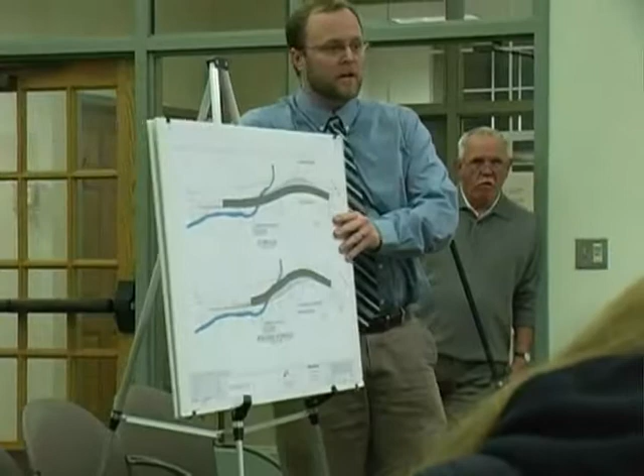Just a quick question - could you please explain how a different design, which is what is under feasible alternatives, would cause more pedestrian and bicycle hazards? How is that possible, if you change the design? That would be the do-nothing alternative. Any of these alternatives we're showing you here would be considered safe for vehicular or pedestrian traffic. The do-nothing alternative is the one that has issues.

We have issues with certain aspects. Oh, okay, so nothing at all, period. Well, the do-nothing alternative means to replace the bridge, but not realign anything, and not make any other improvements. Is that correct?

Correct. My question would be, what's the benefit to the wetlands? Is there any benefit to the wetlands with either of those alternatives? I have another sheet you want to present?

So I'll just give you an overlay, look at the two of them on top of each other, the preferred and the basically two others. Before you go down to the new sheet - excuse me, the basic difference between these two alternatives and the preferred one is one seems to be moved over to the north and the other seems to be moved over to the south. Correct. I guess during the field meeting - so it's a horizontal change in alignment?

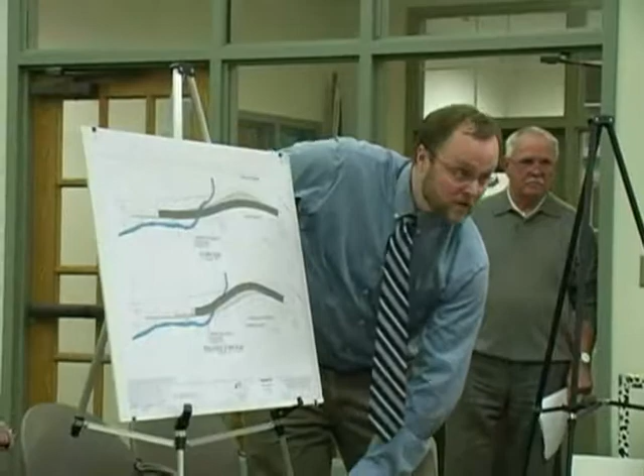Yes, not a vertical - there are vertical changes too. This has more to do with the next sheet, this one right here.

Now, assuming we're going to maintain vertical alignment, vertical geometry, and we're going to move that road over as suggested during the field meeting - this blue line will show the impacts, the cut and fill impacts.

The red line is our preferred alternative, as shown up here on top. The amount of impacts to do that would be just over 3,000, whereas our proposed impacts would be just over 2,000. So you're adding another 1,000 square feet.

You're actually also cutting trees down all along here, even though you're minimizing the tree cut on that steep embankment. You're going to be cutting all the trees down here. We'd also require a taking easement from the property to be able to get this road shifted over.

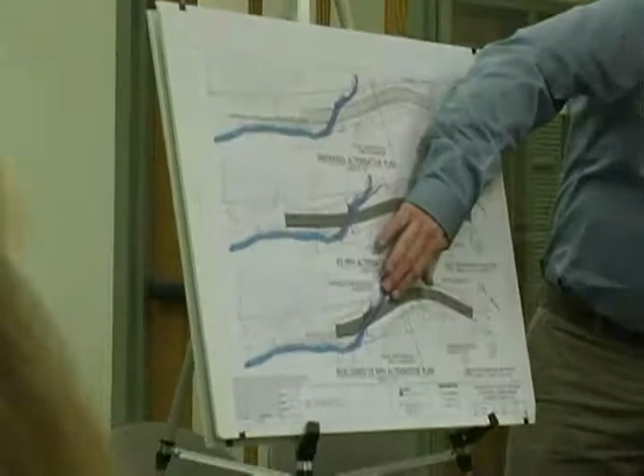It would increase the structure costs because this structure now is elevated and extended much farther than the original, so the structure costs are going to be more involved here. This would be the 45 mile per hour alternative.

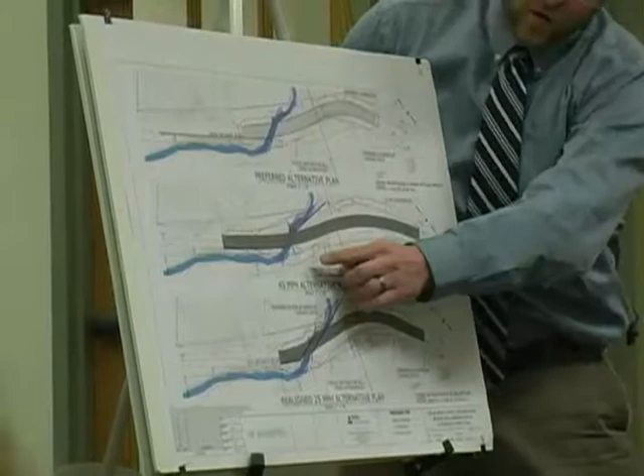Similar thing with the vertical alignment here - the bridge is going to be raised up, raising the substructure to be much higher. So you can see how the impacts are a little greater here because you're going to be filling in more, and about the same, maybe a little less here, about the same up through that steep bank. You're not going to be saving the trees on that embankment. So that's just kind of a layout.

So we have a preferred alternative that we had proposed to the commission, which is 2,000, and then it goes up to about 3,000 with the realigned alternative.

We also were asked - question? Yes. Is that allowed? Do I have your permission to ask a question? Are you finished?

I was going to show the sections, but how about we get the presentation done first and we can ask questions?

These alternatives actually increase impacts to the wetlands compared to the preferred alternative. We're pretty much maintaining the geometry of the road, making roadway and safety improvements here, but the impacts to the wetlands are going to be increased. I was going to go on to the sections next, but if you have a question.

Before we go into sections, do you have a question specific to this? On that bottom alternative plan, the one that's realigned at 25 miles per hour, how many feet are you moving it, going north-south?

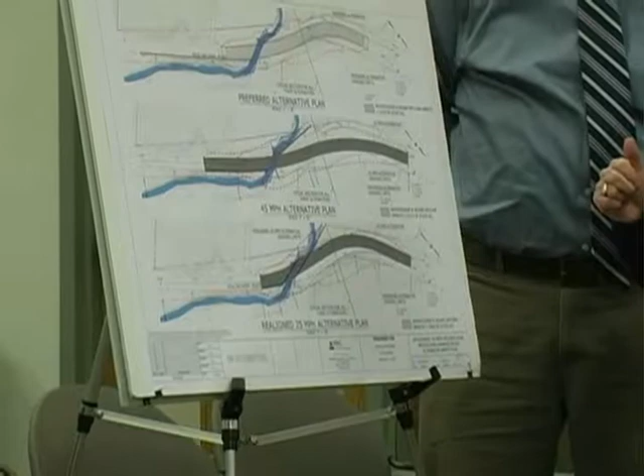I'd have to scale it off the plan, but that red line is the existing road, so it's probably about 20 feet. But the request was to move it 2 to 4 feet to the southeast, not 20 feet. That was a request at the site walk meeting. Do you have a plan describing that? No, I didn't get that as part of the comments, so I did it as a realigned, 25 mile per hour. It was a written handout that was given at the meeting.

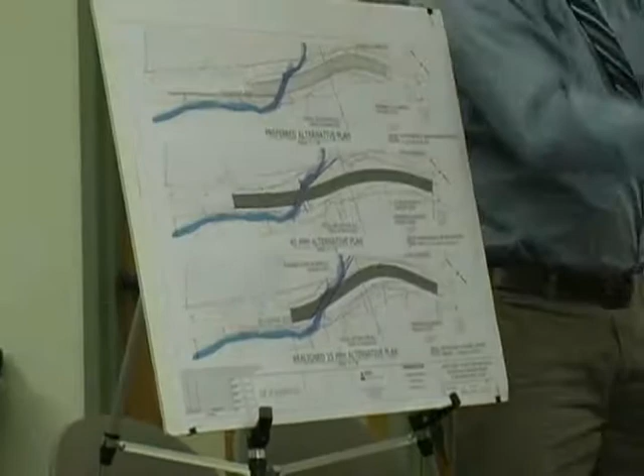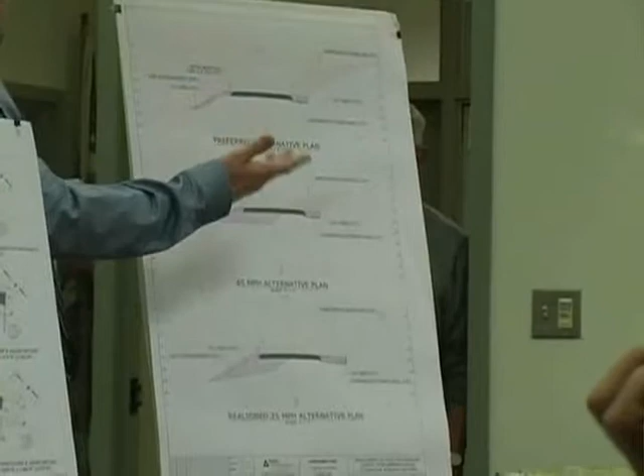The first one is the preferred alternative plan, which shows what we had proposed before. We're limiting the amount of fill that we have here, but there's the cut in that embankment.

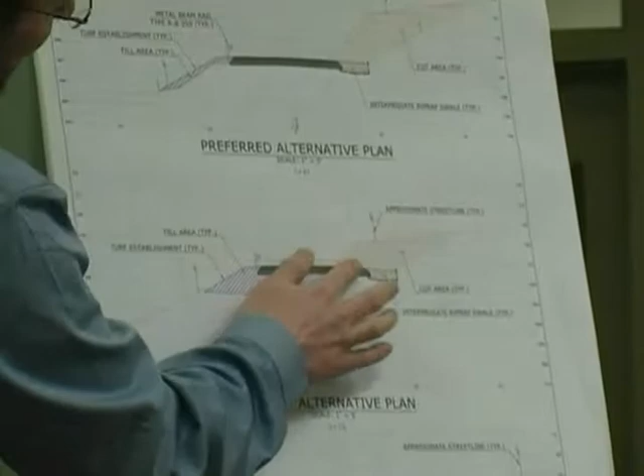Our second was the 45 mile per hour option, where now we have to shift the road over to meet the 45 mile vertical and horizontal geometry. So you can see how the road is above the existing road bed vertically and shifted over horizontally. So now we're still cutting this area back, still cutting that embankment of trees, which means more fill—yes, much more fill.

The third one is that proposed roadway where we're coming off and realigning at the 25 mile per hour alignment. To achieve that, we couldn't achieve a 2-foot move—we'd have to move it 20 feet at that area.

So you understood the request? Well, I don't know, it didn't necessarily work out for this 2 to 4 feet thing. I was asked to realign at 25 mile per hour, aligning it with the project limits, so that's what I tried to present. This way you can see it shifted over, and there's much more fill.

As far as the bank removal—the embankment with trees? Yeah. At the November meeting, Commissioner Dawkins suggested a terracing of the bank. Yeah, we looked into that. That's not really feasible based on our watershed and the required drainage here. If you put a wall in here or any kind of terracing, you're still going to be impacting the slope.

So you're saying if I put a wall right here, to build that wall with any kind of engineering standards, I would have to cut this material back out of there—pretty much the same amount that you're cutting back now. I'd be able to fill back in, but the trees would still be gone. So you're saying it's going to be a negligible difference in terms of disturbance? Correct.

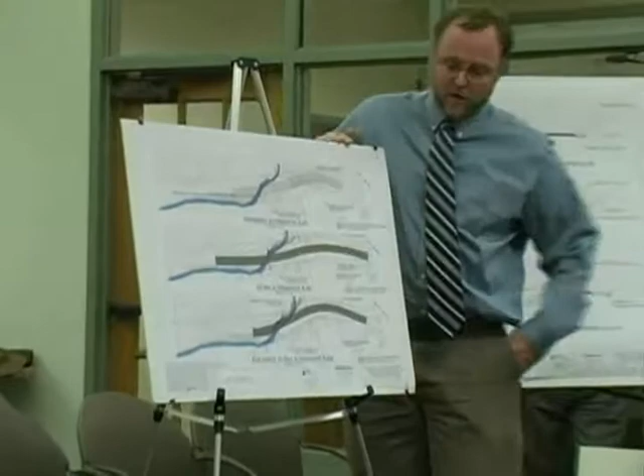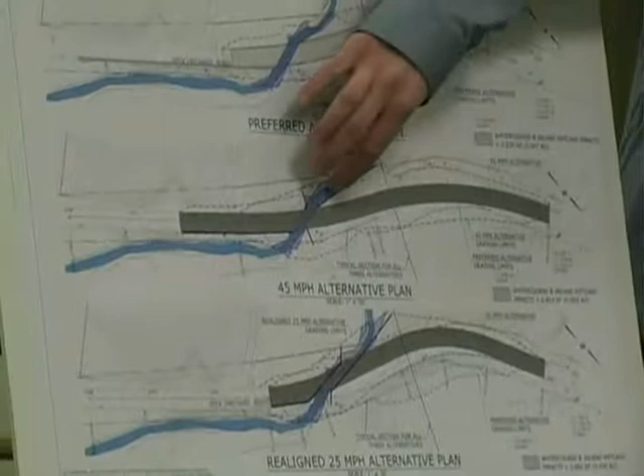The heavy black line is the wing wall? Yes, the new wing wall. So we'd have to make this wing wall that long to avoid filling in because we're raising the road up in this area. And in order to build that wing wall, we'd have to access the channel, coffer in the channel, dig a foundation in there. So you're actually going to have to temporarily move the stream? Yes, depending on the toe or the front side of the wing wall, might be a couple feet. We can try to use some design things to make the heel bigger and the toe less intrusive into the stream channel environment, but I'm thinking at least 7 feet, actually impacting where that channel is, at least during construction. During construction, and after, we'd have to riprap it, put the material on that we described last time, and fix the channel.

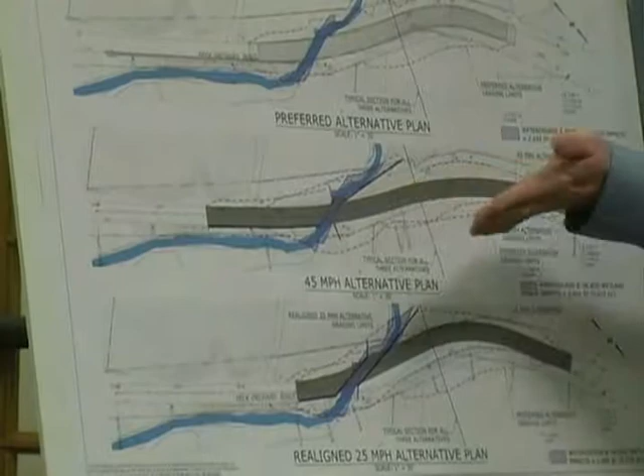So that purple shaded area was just, hey, we're gonna definitely be in this whole area. Kind of moving the channel, we probably have to widen it out a little bit here because we're going to be filling in so much with the huge wall that we have there. If you raise the road, that's got to be the option that requires the most fill, right? Correct, yeah, you can see it on there. This area, just in that one particular section. Now, as you go higher up the hill towards Massachusetts, this is going to reduce down. And as you get to the bridge, that's going to increase.

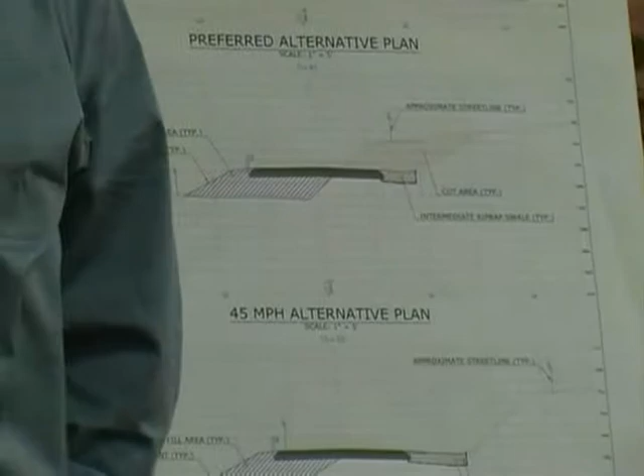Because the new road is going to be 24 feet wide, is that right? Correct. How wide is the road prior to that, coming down the hill? At the bridge, I believe it was 20 feet. 20 feet.

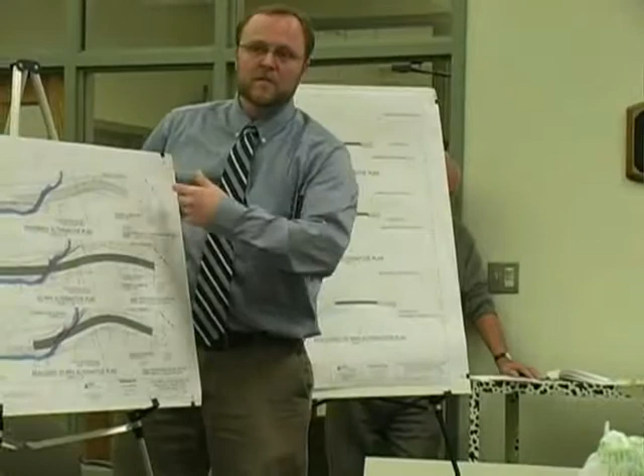How wide is the road beyond that area? It differs, it's not uniformly straight. You don't expect people to drive 45 miles an hour on this little piece of road, but the previous section and after section aren't built for 45.

That's right, that's why we'd have to realign. So what, are we having different speed limits going up here? No, it's posted for 25 miles per hour. Yet this is built for 45? No, our initial design was for 25 miles per hour.

Yeah, but the road you're proposing is for 45, the alternative we're looking at impacts only for the commission. No, sir, we are not proposing that. That was an alternative looked at the request of the commission. We're proposing a 25 mile an hour design speed, not 45. The 45 was just an alternative looked at to show you the impacts, what that would mean.

Because in theory, the road should be designed for 40 or 45 miles per hour according to the DOT and federal standards. We've been able to get an exception to those standards to design it at 25 miles an hour in order to minimize impacts to the wetlands surrounding it.

Probably a proper speed for that whole road. Well, it should be, yeah, that's what it is. It's posted 25, but people are traveling 40 plus miles per hour. You say there's 400 traveling on that road, I doubt that also. There isn't that many people living up above that road.

Do you have one point to make on this statement, that on the road from the Mass border down to the North Granby border, there was a study done in 1997, and the average width of the road is 16 to 18 feet, plus or minus. I have documentation for that for the commission. So we're dealing with a very narrow road to start with.

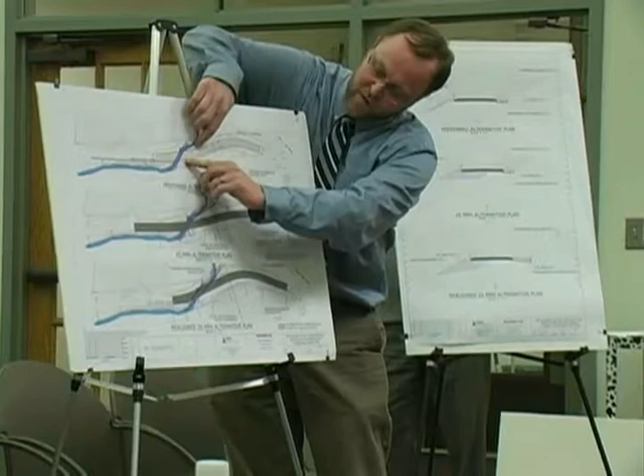Very, very narrow, with many multitudes of curves. You can see an area right here, this black line, this curve, we're matching that edge. It's only a couple feet wider, and then you can see how it changes. We're trying to fit in our 25 mile per hour design, and we hugged this side and expanded it out here, but at the ends we're grading right back in.

Now could you please describe the impact on the realigned, last one, alternate plan? This alternate was to shift it 2 to 4 feet. What I tried to do is meet this incoming tangent at 25 miles per hour to avoid any impacts to the embankment.

I primarily thought that was the main intent, to stay away from the realignment embankment cut here, so I have to put a 25 mile per hour curve in here. That's across pretty much the same profile, and then I had to introduce another 25 mile curve down here.

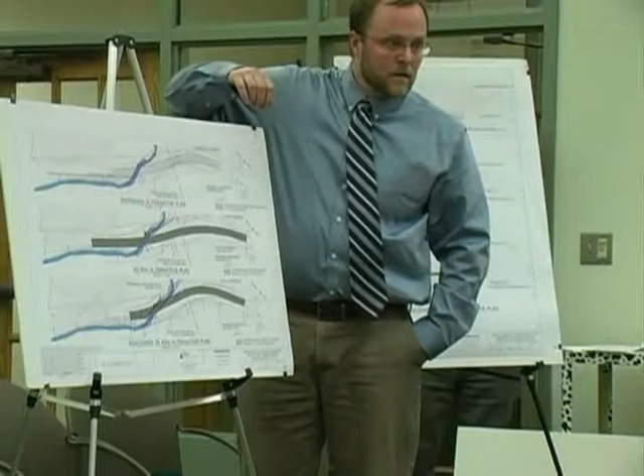So by the request to move it just 2 feet over, wouldn't have been possible? Because you had to design for 25 miles an hour? I have to design for 25, so I have to put a curve in here, I have to meet the incoming tangents, I just can't do a sharp curve and not make it work. My intent, I thought, was shifting it to avoid any cut to this embankment.

Which is up in the upland review area and outside, so I thought that was the intent of shifting it over, to avoid any impacts in this area. As you can see, it's right along the edge of pavement, because I'm assuming we're going to remove that pavement and not leave it there.

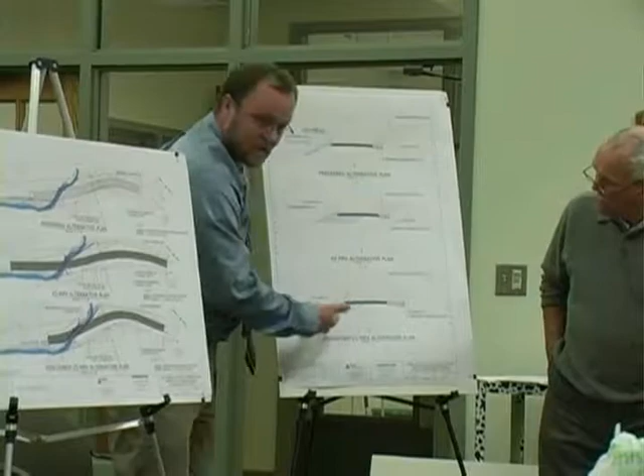So you avoid impact on the embankment, but what do you do for impact in terms of drainage? This is putting in the area for the drainage, I get the water sheet off the road into that drainage, bring that down. Shifting it over is going to start to fill in the upstream wetland area. So in addition to cutting all the trees down, you have wing walls along this plan as well.

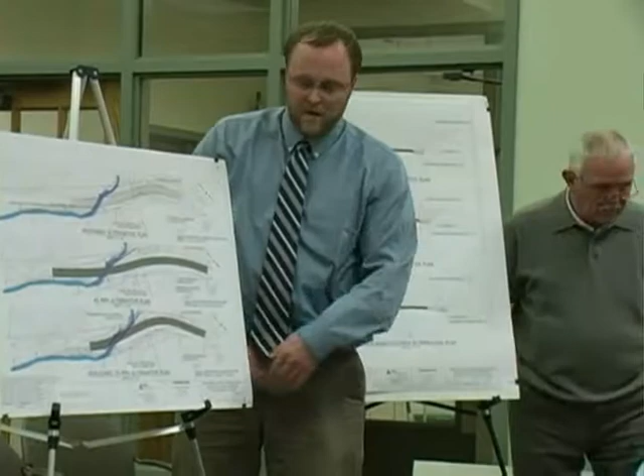On the other, alternate, correct. And graphically they look like they're at least as much impact in terms of wing wall length as you have on the 25. They might not be as high, not quite as high, because vertically I'm trying to match the length, correct.

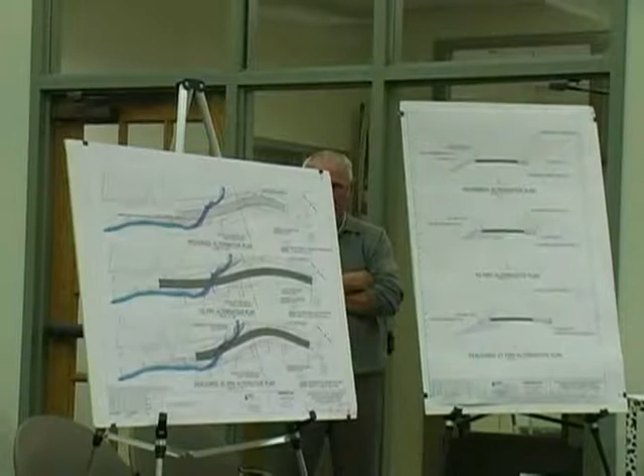I didn't highlight that one as visible, but this plan will show that. This is 1:20, so the scale's a little bit different. Why don't you put it over there so we can see it all together. I'll move this out of the way. Yeah, that's good, you can do that, that's fine.

So where are the wing walls there? I see, the wing walls are in orange. So what we're doing is comparing right now, in terms of the impact of the stream bed, are we comparing wing walls? Wing walls, in terms of impacts to the stream bed, these wing walls and retaining walls, because those are the ones that seem to be impacting the moving of the stream.

This one's gonna be more of the stream, because we're shifting that bridge over. Do you see the blue here, that's the channel? We're actually shifting this bridge back to avoid realigning the stream, so we'll utilize our excavation area here for the stream instead of having to realign any material up here. So I shifted that structure back in the picture, so I can make a nice U-bend in here instead of having to...

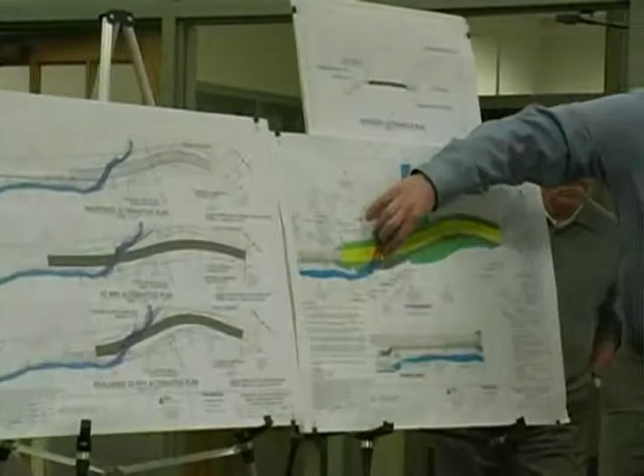Why would you shift it? Well, if I put this structure here, I'd have to make this wall even longer to match that grade, because now I'm shifting it over. So what I tried to do is use the natural alignment of the stream to go through, and put my abutment wall here.

On your preferred alternative plan, the bridge is in exactly the same spot it's in now? Yes. And the other two plans have to be moved? This plan, no, the 25 mile per hour, I kept it in the same spot. Bridge itself, right, because the alignment is conducive to not having to realign the channel. This alternative, shifting it over, this channel has a little S curve in here.

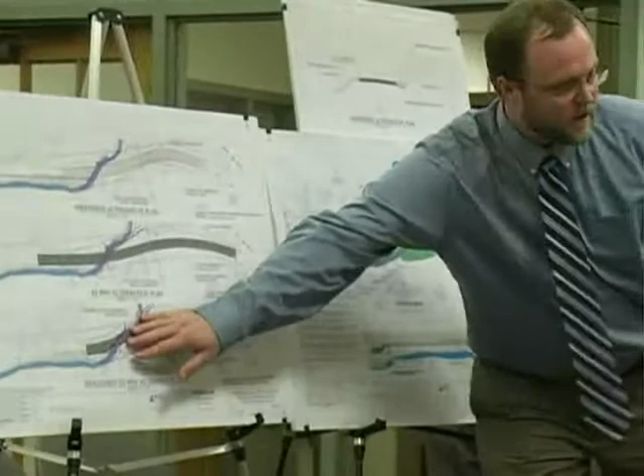For me to do that, I would have to go on the other side of the property, other side of the stream, and hook out a channel in here. So I shifted that bridge down slightly, maybe 10 feet or so, just to make that channel kind of realign, so I wouldn't have more impacts to this wetland environment over there.

So going onto that property and cutting trees down for the channel realignment - just to summarize, the realigning of the channels is a lot less than your preferred alternative?

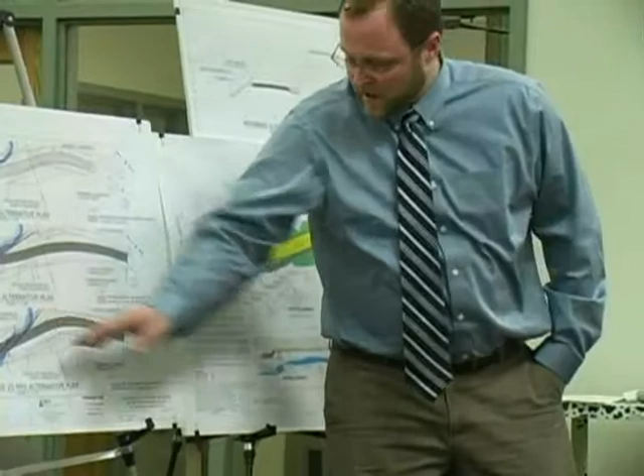Yes, 1,000 square feet, and that doesn't include any of the disturbance that would be necessary outside of that wetland review area. All I did was quantify the water course and wetland impacts. Are you saying it's 1,000 square feet less? Yes, we have about 2,035 as opposed to 3,060.

And that doesn't include the structure costs of the town, anything like that. That just impacts solely the wetlands and water course, and like I stated, it didn't have anything to do with the upland review area impacts.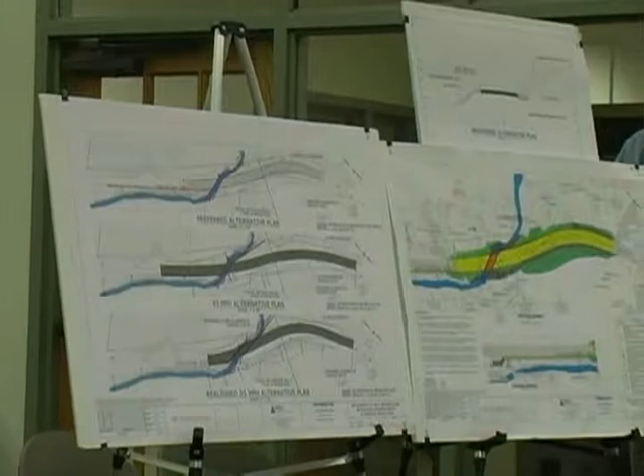Okay, very good. One other thing we'd like to discuss, if we can continue on - there was also a question about the treatment of stormwater runoff downstream in front of Sue's property, where Sue - oh, there she is over there. We had a discussion in the field about the sizing of that, so we re-looked at that, and John's got an example of that.

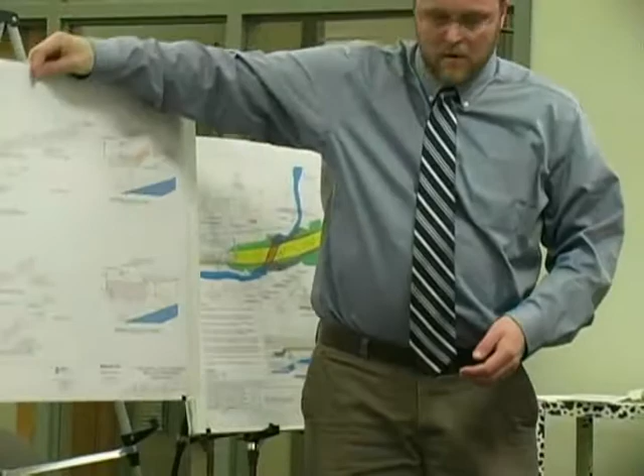Yeah, I guess in the field meeting a size was given. Do you remember the size, the length and width? The scour hole? The scour hole, correct. Okay.

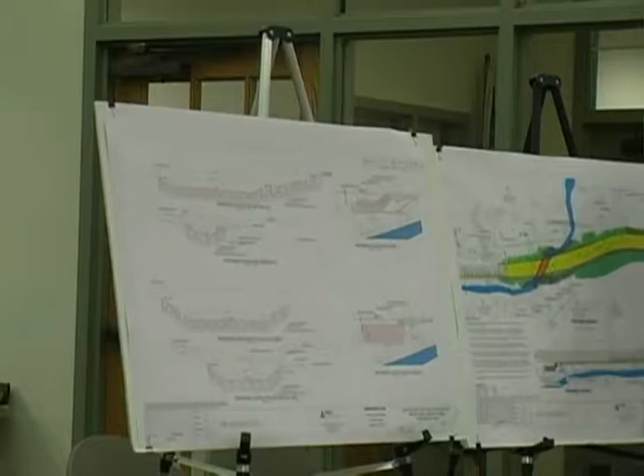If you couldn't use natural methods to control the stormwater runoff as per the Clean Water Act, the Connecticut Clean Water Act recommends, then try to improve the curbing by lessening it, because curbing is a no-no according to the state of Connecticut Clean Water Act.

And you're going to need to do something with that scour hole, because our town cannot afford to clean it every month with all the sand that's going to be going into it.

So I suggested to increase it by 10 by 14, and I think Steve said you were going to double it. I really don't know the specific figures. I also recommended that you add some swale going up to the pole.

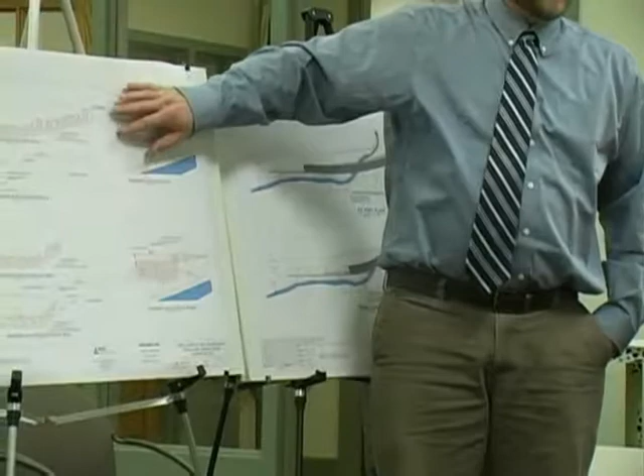Now this will be 25% of the water quality volume. It wasn't necessarily designed to treat any water quality volume, except to fill up with that 25%, infiltrate, and anything else comes out. In order to treat the water quality volume, we have to make it meet 0.01 acre feet, which is about 440 cubic feet.

Increasing the size to 26 by 15, so you're pretty much making it 4 times bigger than we have.

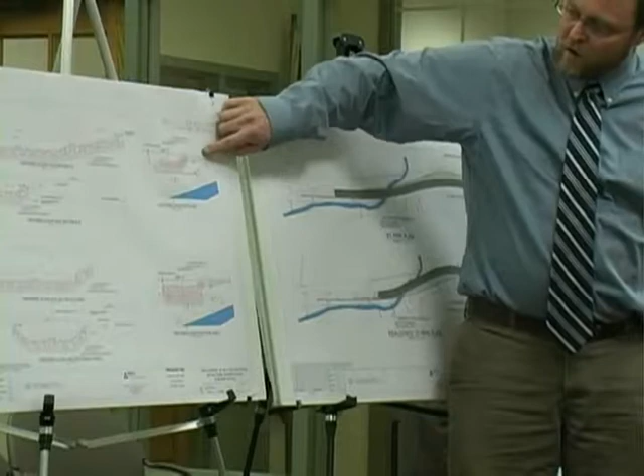In plan view, you can see what we have proposed here in red. We had the water come off the road, down to a little swale into the preformed scour hole. It's going to fill up, 25% of that water quality volume was going to infiltrate. The remainder was going to overland flow to the stream, about 20 feet of overland flow through the trees and brush.

To treat the water quality - that was the original intent. The original one, okay.

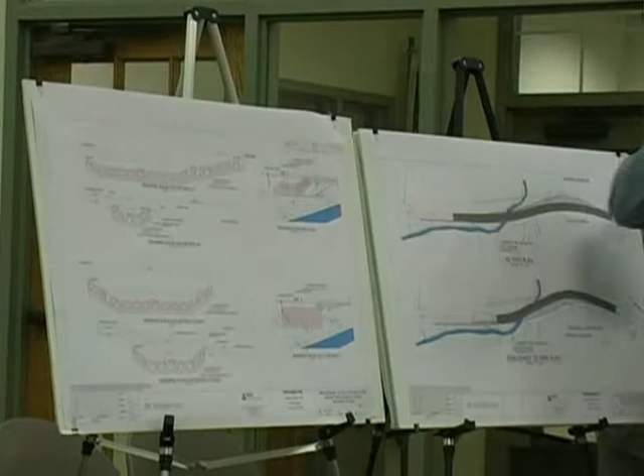Well, the original submitted plan showed a scour hole about 10 feet long, 6 feet wide, with about a 10 foot long modified swale going into the 10 by 6 foot scour hole. That's on the original plan.

So you increased it to what now? This is the one that was submitted in the inland wetlands application. Regardless of what was presented before, this was presented in the inland wetland application.

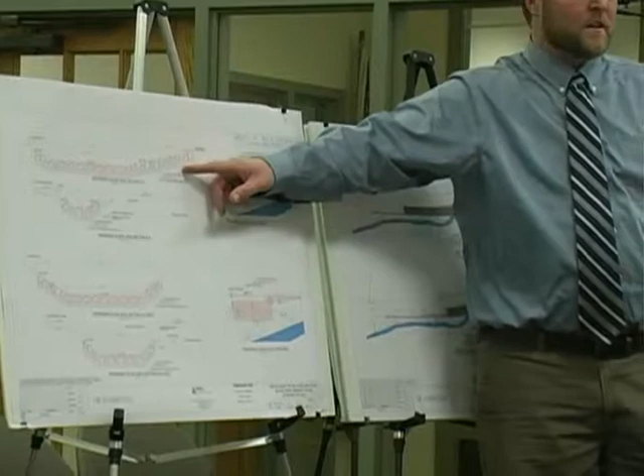And you said that you chose that size to try to decrease the impact on people's property? Yes, because the property line is right here. I have a highlighter.

So that's the property line. I'm trying to stay off the property by doing this design.

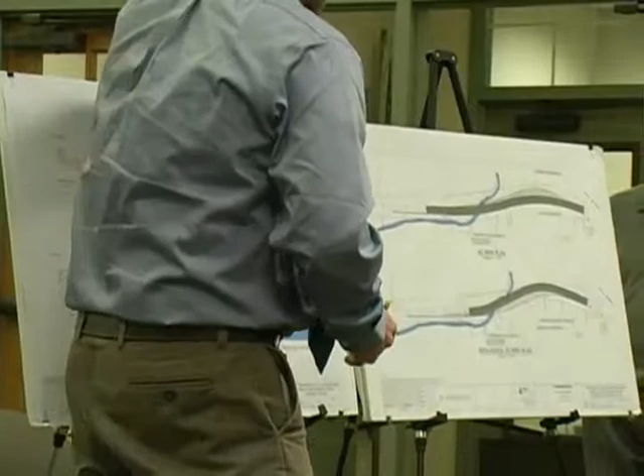Pretty much just trying to capture some of the water, because the embankment from where we're putting the curb in - the stream's right there. Right now you have buildup of sand on the side of the road, causing the water to concentrate, blow through in certain areas, and deposit all the sand in the stream.

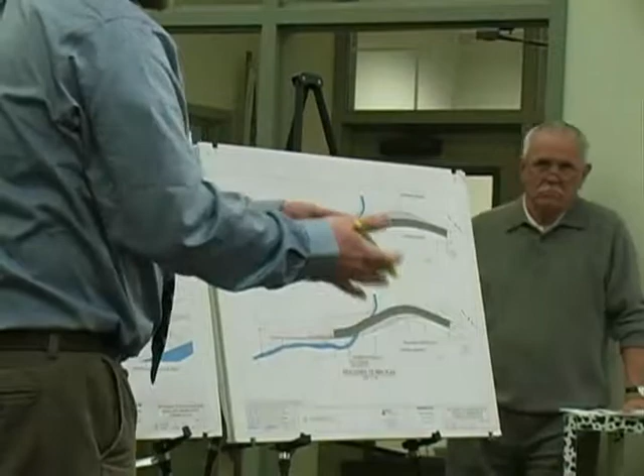So we decided to put a curb there and bring it to where the sediment settles out, and the town will clean it. If you don't do that, you just let it sheet flow, the same thing's going to happen - it's going to build up on the side of the road, eventually concentrate, blow through, and you're going to have the washouts like you do now.

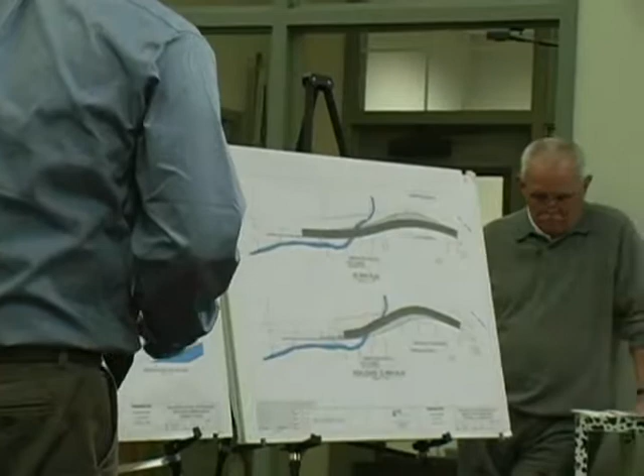So yes, the town will have to maintain this, but I'm assuming the town has maintenance vehicles, catch basins and things that you have to maintain already. We have a catch basin, excavator, shovel available. Let me go back to this so we can see better.

The bottom line is what you came up with as the increase. Instead of just lengthening it, you widened it as well as lengthened it? Yes, I've lengthened it and widened it.

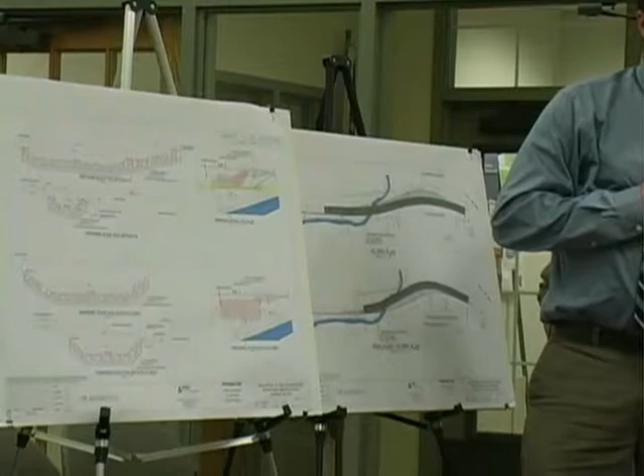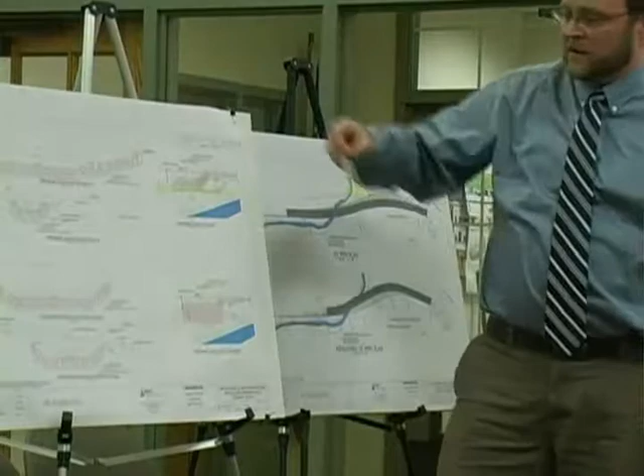There's some mature trees in this area, so I didn't want to make it any longer. There's that utility pole, which is right in this location - yeah, that's 2119. So for me to go any farther this way, there's some big trees here I'd want to cut down. I want to kind of keep it in an area which is grassy at this time.

But the extent of what we said was, okay, if we're going to make it a little bit bigger to treat anything there, we might as well treat the water quality volume. In order to do that, we have to enlarge it - make it 3 feet deep, deeper and wider, and that's what this picture shows.

And that doesn't require removal of any mature trees? Yes, because there's some mature trees down here which will be impacted by this cut.

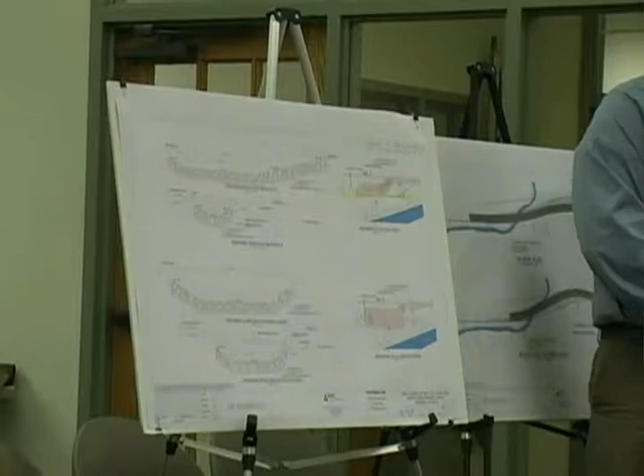There's going to be trees here where the roots will be impacted. How many trees would have to be removed? I didn't count them for this. Now, are you presenting that as an alternative, or have you guys chosen which one you're proposing to go with? It's the first one, of course.

This would require more defined easements on the property. So that's the one with more impacts, that's the one you submitted? Yeah, that's the one on the plan. So you're going with the original sizing? That's what's in our application. If the commission desires that we go to our alternative, that's the one that's on the plan.

That could be a condition of approval. We don't have a problem going with the alternative. But you're not going to lengthen the modified riprap swale going into it? You're not going to lengthen that?

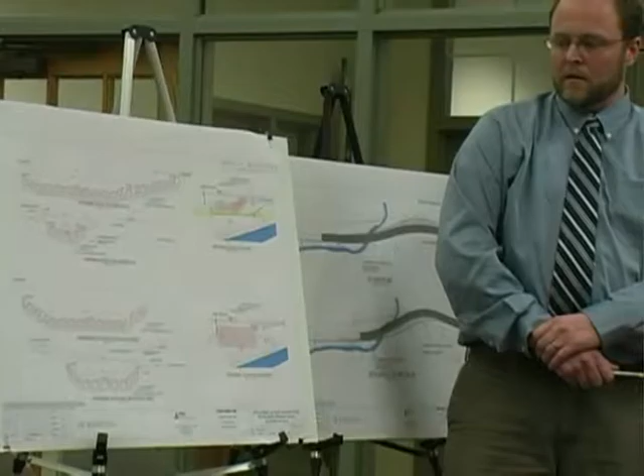Now this little swale, what I think he's talking about, is after we come down the road and we end our guide rail system right after that utility pole. On this side of the utility pole, that stream gets really close to the road, so we're protecting that embankment from any cars going off.

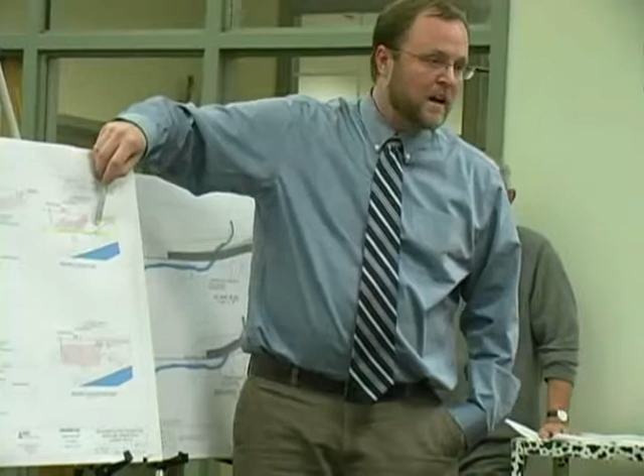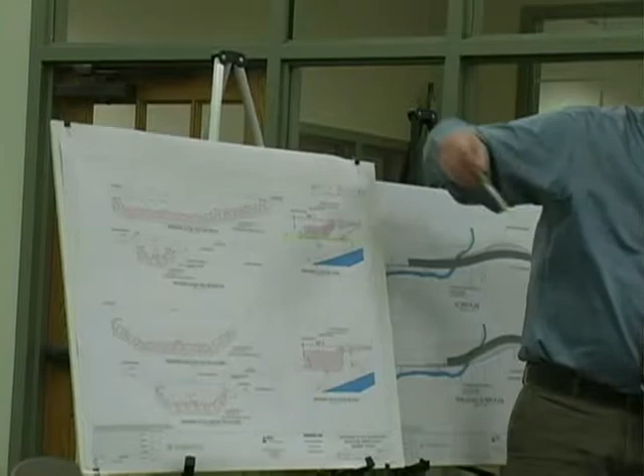So right after this utility pole, we're putting an anchor on it, for cars crashing. And so we're pretty much trying to get this water that's going to be in the gutter here, we're going to try to get it over by coming down and into this scour hole. We can modify that if the commission wishes to try to reduce this, shift this over here.

I just don't want to really affect the guide rail anchor. So I want to pave the swale, at least pave past it, so there's no undercutting or any future issues. So where's the curbing end?

Right here, at the end. So you haven't changed the length of the curbing at all? No, we did not. We weren't able to because we looked at it very carefully - if you don't have curbing, you've got to get it into a swale or something. There's no room really there to do it.

Right, so we had to leave the curbing where we had it. We tried to shorten it up, because I know you've mentioned that several times, to try to shorten the curbing up. And the guardrails, what's the reason for bringing the guardrail all the way down there?

You mentioned 25% water quality with the first one. Correct. Now, I didn't hear the second one. The second one is 100% water quality volume. Water quality volume is 440 cubic feet. The first one we had is 112.

And I didn't necessarily design this to be a water quality treatment system. It was just pretty much a scour hole as a standard outfall protection. We made it bigger to accommodate for some more water and some more sediment capture. Okay, so this should be far superior.

Yeah, in terms of the water going back into the stream, your second alternate shown down below, this one's going to hold more water, but it's going to require more impacts - not only to private property, but also to the wetlands. This is pretty much at the same level as the stream.

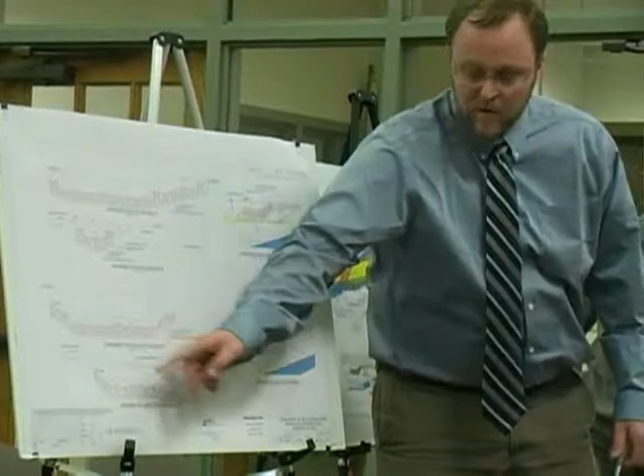Okay, you're right, digging a big hole there. So it'll probably be filled during high water. When the stream is up, it'll be at the same level, probably. If the stream overtops this elevation, if it ever overtops the road, that would be filled.

In the long term, not for construction - you'd have to remove trees and so on - but in the long term, would you say it would improve the water quality going back into the stream if it's properly maintained, or would it be negligible? I think if it's properly maintained, yeah, you'd be treating the water quality volume every storm - considerably more, because it's 100% as opposed to 25%.

I know a lot of the water quality issues you deal with involve parking lots where you have a lot of sitting cars that leak gases and oils. So in terms of what it's actually going to be doing, I feel it's going to be negligible, as you said, because cars are just driving by. If it was a parking lot with a lot of oil and grease getting on the road, antifreeze dripping, this would be different.

So what's actually going to end up here is more roadway sand. And if it's properly maintained, that'll keep that out of the river. Yeah, it'll help keep that intact.

So even though this is more invasive in a way than your proposed scour hole, in the long term it might be better for the water quality and for keeping sediment, or especially sand, out of the stream. Yeah, I mean, this is definitely going to have more volume, but like I said, it's going to require much more impacts.

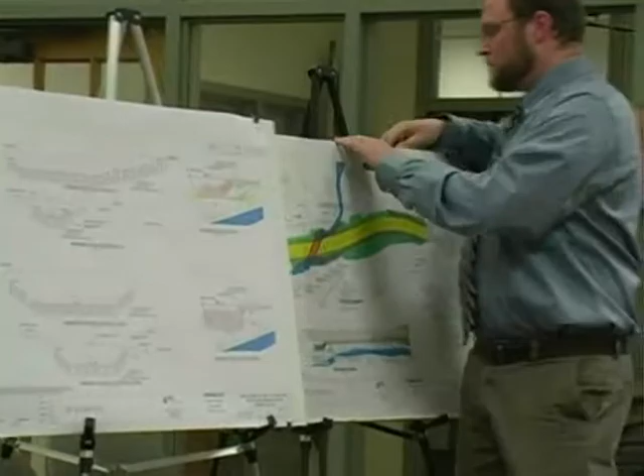Well, it's like nothing's free, you know? Yeah, I know. It's either you're going to take some trees down for better water quality treatment, or not. But the water quality treatment involves the trees now. Yeah, exactly. But the trees are a natural water quality filter.

And why isn't there any natural filtration system provided in this plan? Natural filtration systems - what do you mean by natural? This is groundwater filtration, the water's going to go through the rock into the dirt. Filtration through the vegetation - runoff filtration, are you saying? I'm talking about direct groundwater filtration. I'm not an expert, but pretty much the water sits here, and over time the water percolates into the soil - groundwater recharge.

I think what she's explaining is sheet flow, sediment going through a grassed area, a wooded area - the sediments will settle. But we don't have room for that. We could, but we're trying with this design to provide a little bit of sediment capture. Instead of letting the sediment migrate through here and keep migrating through, we're trying to stop it.

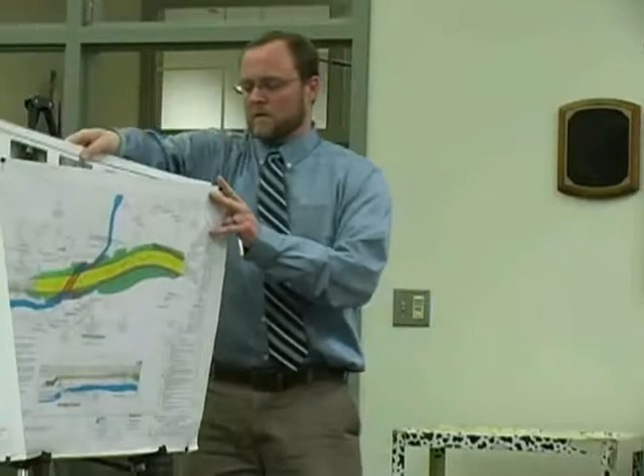That becomes another issue, treating water laden with dissolved salts. Better infiltration is the alternative to just allowing overland flow. We're trying to stop some of that with infiltration - I believe we stated that in the application. This would just treat the water quality volume that DEP likes to have on a lot of these big commercial sites. It's part of the treatment train. Just to show you, the size difference would be required to meet that.

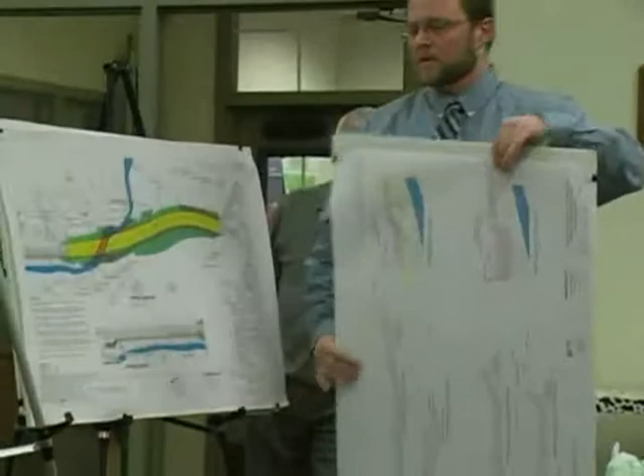Is there any other questions the Commission has? Yeah, I just have one last follow-up. Why is it that when you increase the length and the width of the scour hole, as you have in that alternative, why does the depth have to be increased?

It doesn't have to be increased, but if I need to meet the water quality, what I'm trying to do on this one would be greatly increased. I don't understand why you have to dig it so deep. Well, if I don't dig it so deep, I have to make it even longer to get that volume. We need to retain a certain volume of water, so many gallons. And if it's not as deep, it's got to be bigger area-wise.

So we could make it twice the size and only 1.5 feet deep, or 1 foot deep and 300 feet long. But the original design is shallower than the alternative. Correct, that's correct. We were not trying to treat the water quality volume at that point. We were really trying to protect from erosion and get the water back into the brook. It wasn't really there to treat the complete water.

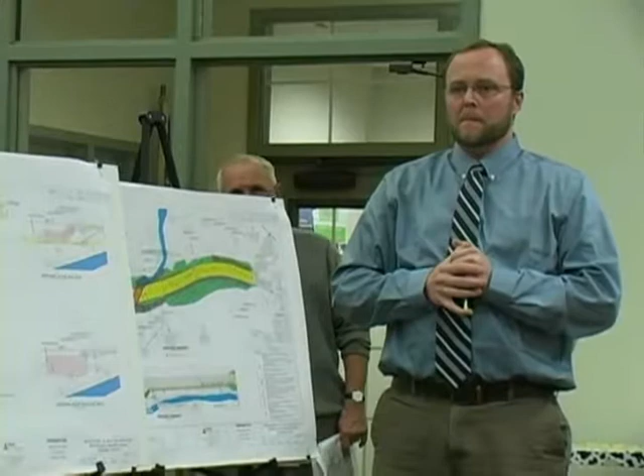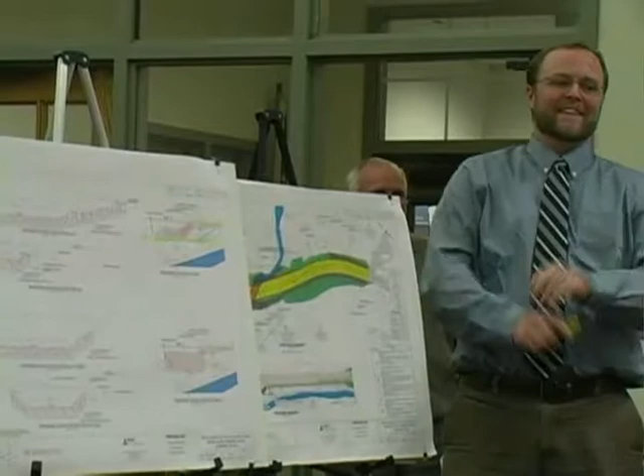I think we got two things we're talking about here. I thought the original direction this line of thinking was going was just to extend the length of the scour hole so it could absorb more sand before it had to be cleaned out, as opposed to a whole design for improving water quality. That's a whole different thing.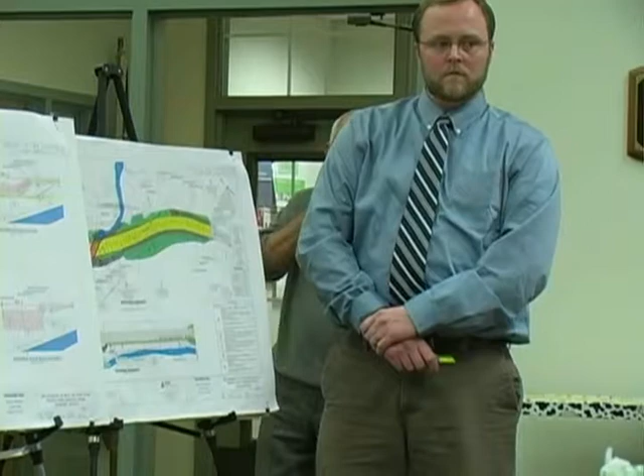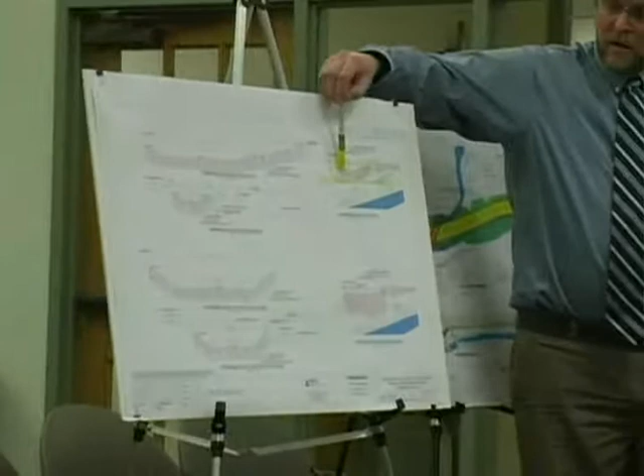You're considering the improvement in water quality. If you forget that and go back to the original purpose of the scour hole, the question was: can we make it longer so there would be less likely for that sand to go back into the stream, so the town wouldn't have to clean it as often? But the same amount of sand's gonna get there whether I make it another 50 feet longer.

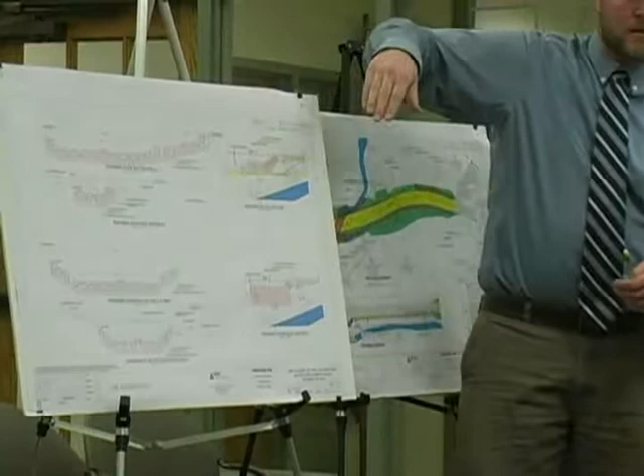Eventually, right - most of that sand's gonna deposit in that first section, then it fans out. It doesn't matter how long it is - if you have a 50-foot level section, the sand comes down just like in the stream and deposits right at the bottom, then gets moved through. It's the law of diminishing returns - the longer you make it, most of that sediment still deposits right there, so it wouldn't really make a big difference if it was twice as long. No, then I'd have to be cutting more trees.

There's actually a driveway right around here, about 70 feet down. So a driveway somewhere in this area. I really don't want to be cutting these trees down - there's a grassy area that I think we can get into with minimal impacts. And that's what you've shown - that's what we kind of have shown.

So obviously the smaller one is gonna fill up faster with sediment and need more maintenance on a more prompt basis. Yes, and it's gonna be overflowing into the stream. I'm looking at it like a cereal bowl - the bigger the bowl, but not deeper, it may hold less. The difference is the cereal bowl you fill from the middle, and this one you fill from the end.

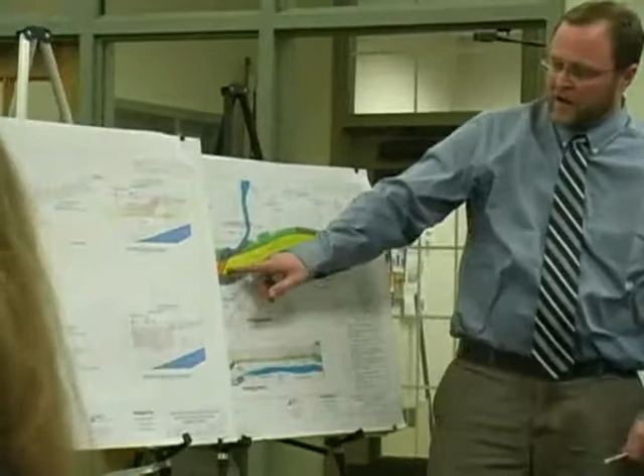That was his point, which is filling from the end means your sediment collects in the front, kind of like a dam or a berm. Remember, the water coming in this area on the road, we're really just trying to keep that sand from going directly into the stream, trying to get some capture. That was the intent. This will be pretty much like a level spreader, like you've probably seen on projects, where this elevation is the same elevation with riprap, and water then migrates down through it.

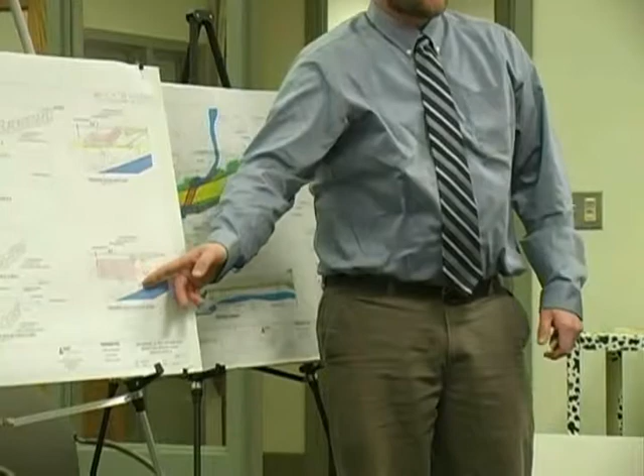Once a year - typically you shouldn't have as much erosion on the banks as you have now. It's just gonna be the sand you put on the road. I don't know what that holds, but typically you might use...

Maybe half a yard to a yard per storm in that section of road. Just in that section? Maybe. And it's not all gonna go right down that one spot. On that road, you're only talking very small amounts in that area. No, there's a tremendous amount that fills right to there, especially with 200 feet of curb.

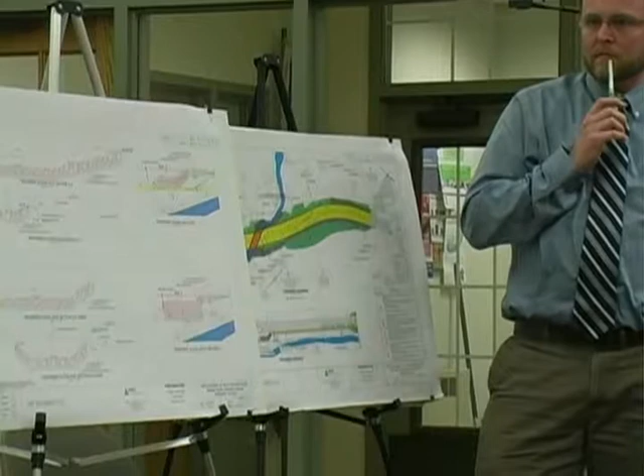Yeah, but when you're sanding all the gravel right there, the road is heavily sanded because it's very steep and very curvy, and you're increasing the impervious surface - you're getting 20% more road surface that has to be sanded. You think that increases the sand?

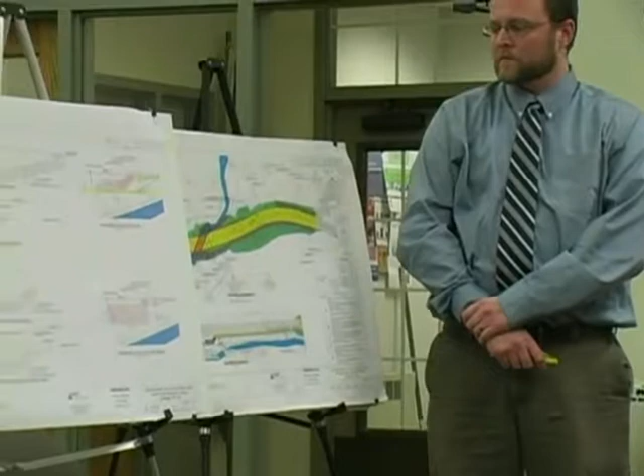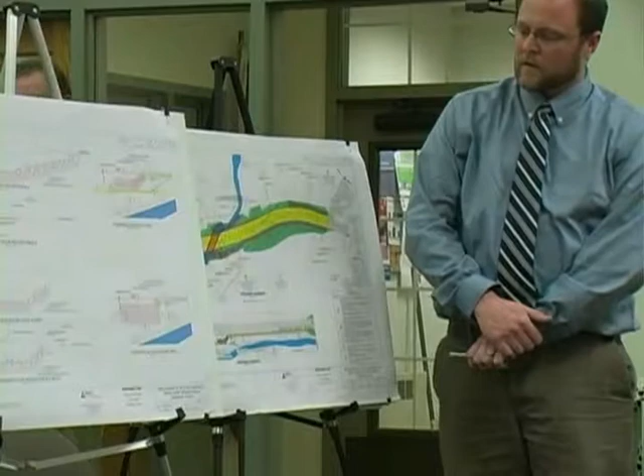It's gonna be a definite increase. When I do 12 miles of road in West Hartland, I use about 6 yards of sand to treat it per pass. If it's an ice storm, you're gonna use more. That's 12 miles of road, but it would definitely be an added maintenance to the town at a cost.

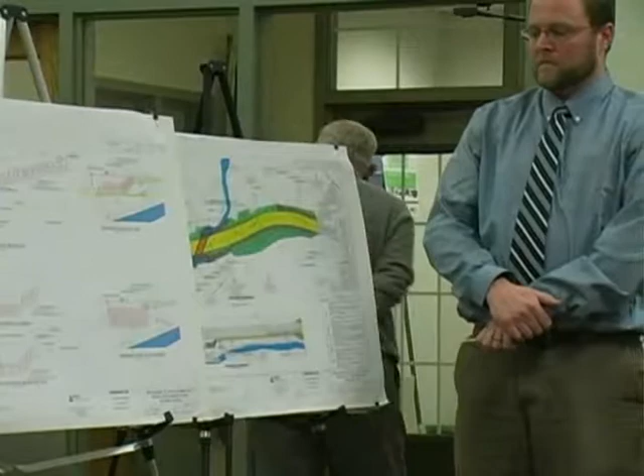And that's a lot of what the stormwater program is about with the Connecticut State Clean Water Act - they want to prevent scour holes so that it's lesser cost to the towns. That's true for large cities and small cities, and there's been many articles in the Current about it, and there are ongoing public hearings right now to have natural filtration.

On that note, without doing any huge modification, is there any alternative to do without a scour hole? It doesn't seem like that. Go back to no curb, and let it go into the brook. It's gonna go in the brook right now, it's gonna build up - it just all dumps directly right into the brook.

Yep, it's gonna build up, with no ability to clean it out or anything. Exactly, it's gonna be much harder for the town to go in there and scoop out the sand that's in the river than it is from the scour hole.

So from your professional point, any of this is an improvement to what's there now, correct? Yes, that's correct, from an engineering professional point. Then you have the environmental professional expertise, which may differ - that's a trade-off.

But let's move on. Do we have anything more that you want to add? No, I have it all said, and if you have any questions, I'll be able to answer. Okay, maybe we should move to...

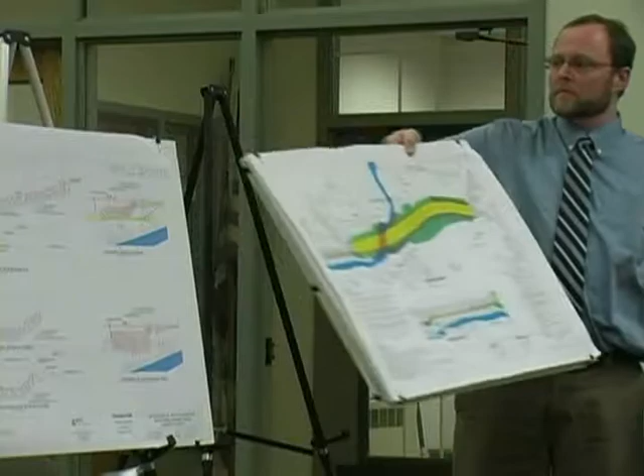No, please, again, if we could first present new information. Here it is.

I know a lot of this is dealing with zoning and road issues, and this is a wetlands commission. I feel for you because it really shouldn't be part of your application. But the project to me is disturbing because of the extraneous work beyond the bridge repair.

I turned my focus to review the project in depth and quite honestly have spent hundreds of hours researching and learning. It's not uncommon for me because when I work on volunteer projects, such as our 10-year plan and the Lower Wild and Scenic Study management plans, I've done the same thing. The experience can be trying, but gaining knowledge and a desirable end product makes it all worthwhile.

I've said this many times before, but my goal for the bridge replacement project is to bring to the table a plan to satisfy all the parties. I've searched high and low, all my resources, met with people, took time off of work, read the Connecticut Highway Design Manual, spoke with different groups, and I might need to build an addition to file all my paperwork.